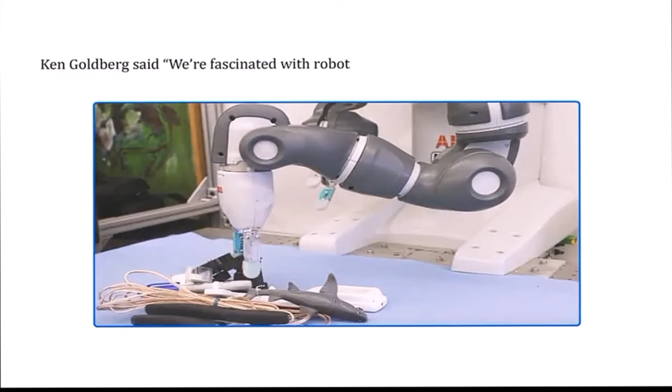Today, let me introduce you to robotics. All of you must have seen the film Wall-E based on robots. If yes, then you must be aware of what robots are and how they have changed human lives. Ken Goldberg said, "We are fascinated with robots because they are reflections of ourselves."

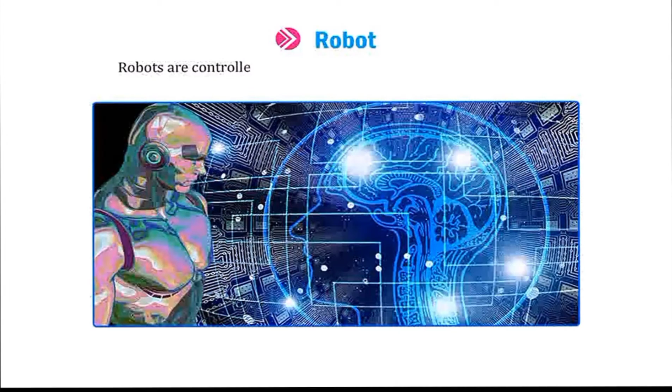First, let us talk about robot. A robot is a machine that is programmed by a computer and can do many complex actions automatically. Robots are controlled by an external control device or from within. They can be designed in human form, but most of them are based on machine design. They are programmed to perform all tasks regardless of their looks.

The word robotics has been derived from the word robot. It was introduced to the public by the Czech writer Karel Čapek. This word comes from the Slavic word robota, which means slave or servant.

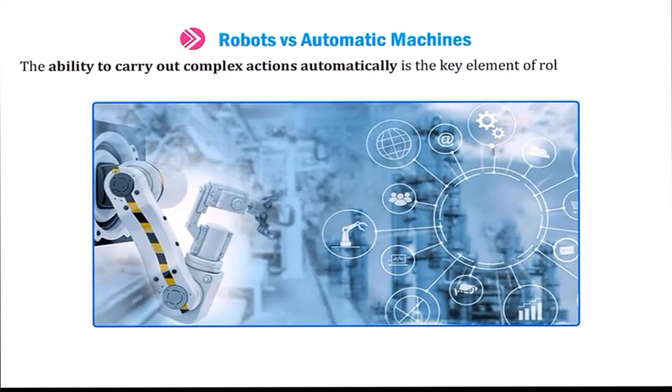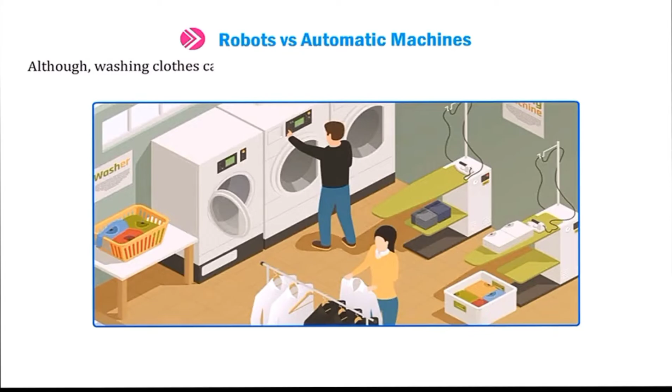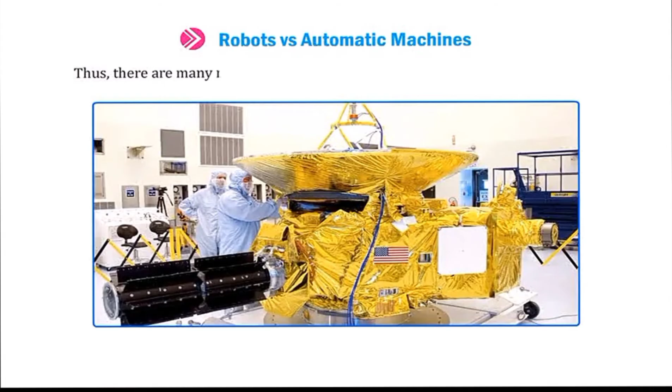Alright students, let us know more about robots versus automatic machines. The ability to carry out complex actions automatically is the key element of robotics, but it is also true for many other machines like washing machine, microwave, dishwasher, etc. Although washing clothes cannot be considered a complex series of actions, flying a plane on autopilot mode definitely consists of a complex set of steps. Thus, there are many machines that are almost at the cusp of automation and robots.

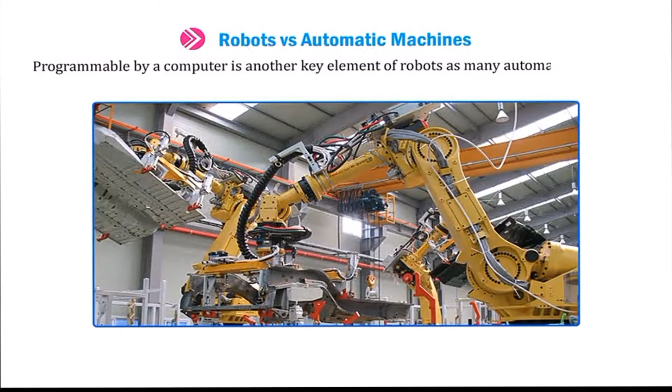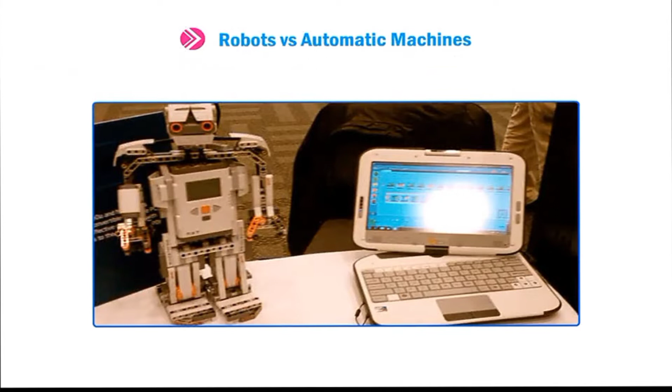Programmable by a computer is another key element of robots, as many automatic machines are programmed mechanically and not very flexible. But since computers are found everywhere now, it becomes difficult to use this aspect to distinguish a robot from another machine. How can you differentiate between a robot and an automatic machine?

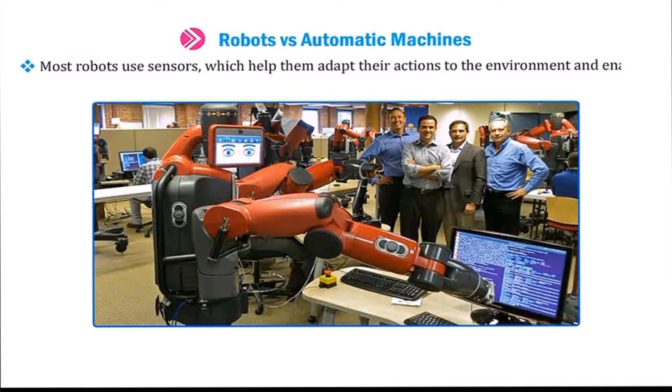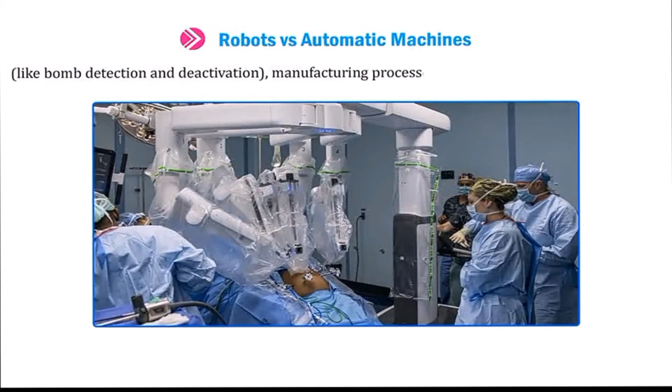Most robots use sensors, which help them adapt their actions to the environment and enable them to carry out complex tasks. Robots can be used in any situation and for any purpose, but primarily they are used in dangerous environments like bomb detection and deactivation, manufacturing processes, or where humans cannot survive.

Students, now let us talk about history of robots. The following table gives you a quick glimpse of the history of robots.

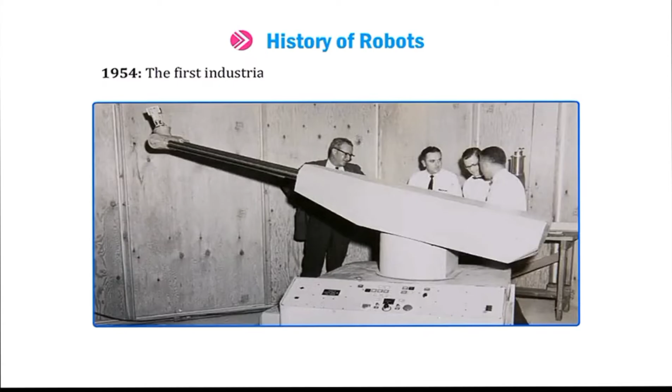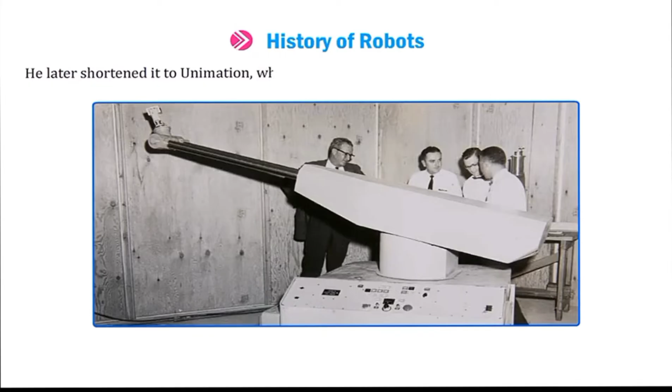1954. The first industrial robot, Unimate, was designed by George Devol. He coined the term universal automation, later shortened to Unimation, which became the name of the first robot company in 1962.

1978. The Programmable Universal Machine for Assembly, PUMA, robot was developed by Unimation, with General Motors design support.

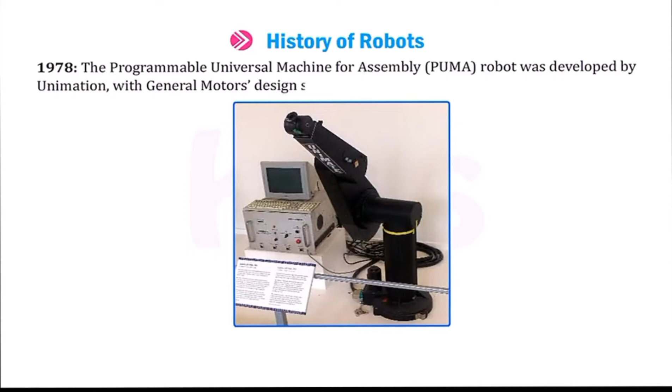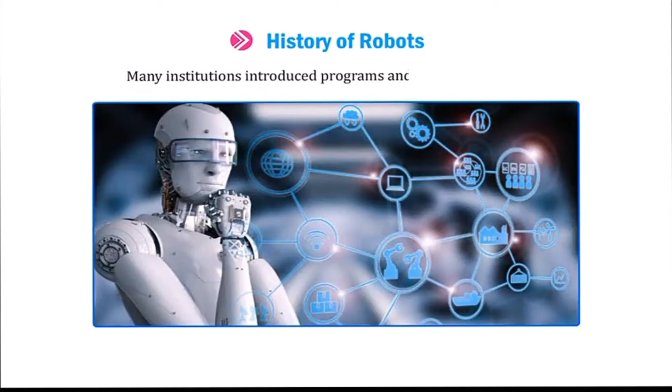1980s. By this era, the robot industry had entered a phase of rapid growth. Many institutions introduced programs and courses on robotics. These courses were spread across various branches, such as mechanical engineering, electrical engineering, and computer sciences.

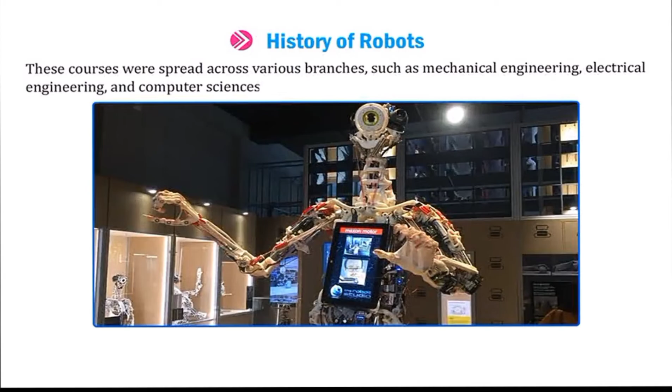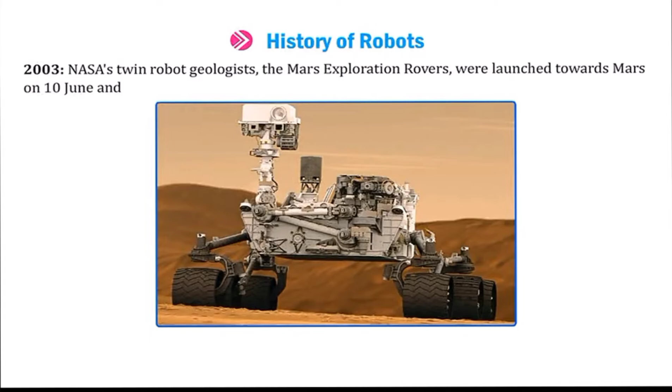2003. NASA's twin robot geologists, the Mars exploration rovers, were launched towards Mars on 10th of June and 7th of July in 2003. They were sent in search of water on Mars. This program was a long-term effort in the field of robotic exploration of space.

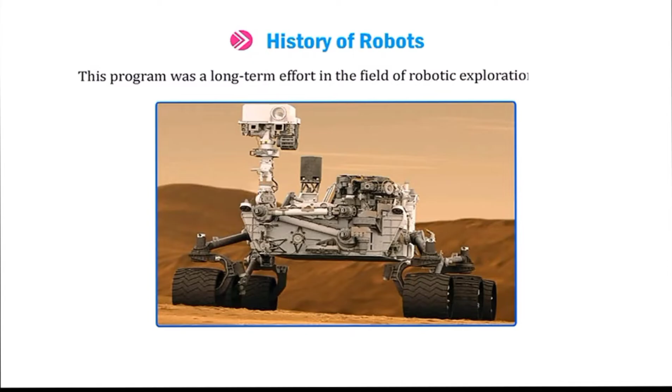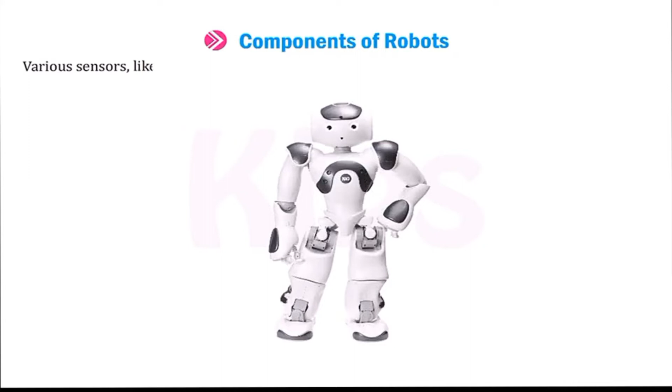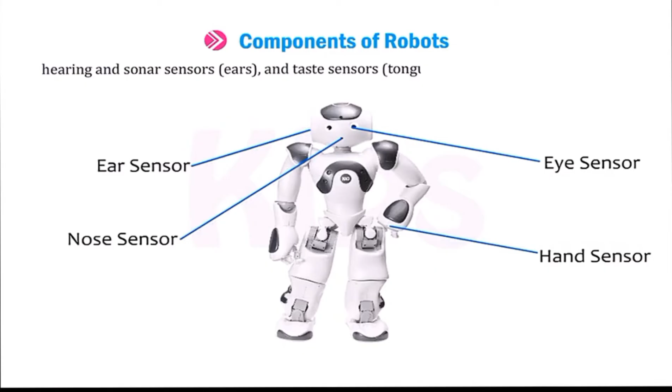Okay students, let me tell you some components of robots. A robot has the following essential components. Robots interact with the physical world via sensors and actuators. Various sensors like light sensors (eyes), touch and pressure sensors (hands), chemical sensors (nose), hearing and sonar sensors (ears), and taste sensors (tongue) give a robot awareness of its environment.

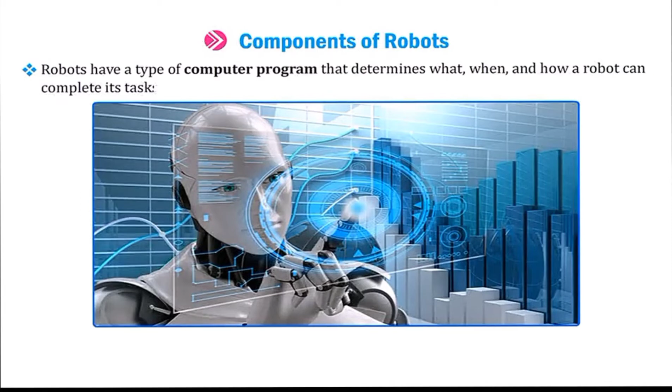Robots can easily move around and have electrical components for providing power and controlling the machinery. Various mechanical constructions help to shape or form the design of a robot so that they can accomplish a particular task. Robots have a type of computer program that determines what, when, and how a robot can complete its task. They can carry out a complex series of actions automatically.

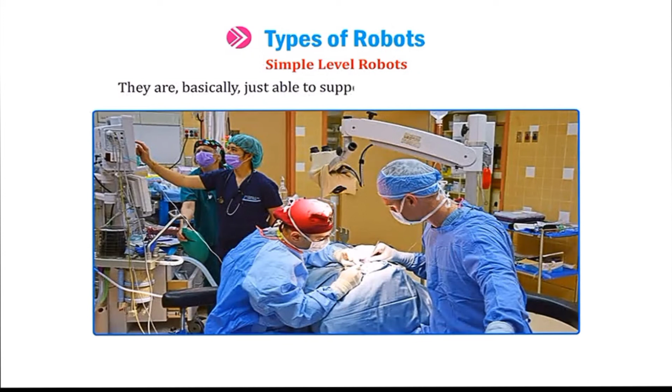Students, now let us talk about types of robots. Depending upon the use and application, robots can be classified into three types. Simple level robots: these are simple and cannot carry out heavy or complex tasks. They are basically just able to support humans in their daily tasks, for example washing machines. Middle-level robots...

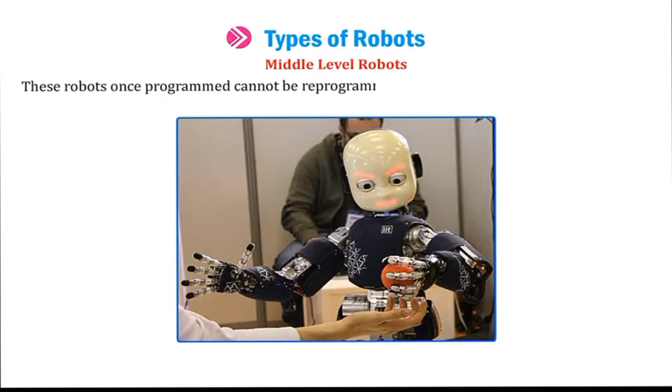These robots, once programmed, cannot be reprogrammed and have sensor-based circuits which can perform multiple tasks, for example fully automatic washing machines. Complex level robots: these robots can be programmed and reprogrammed easily. They have complex model-based circuits, for example laptops or computers.

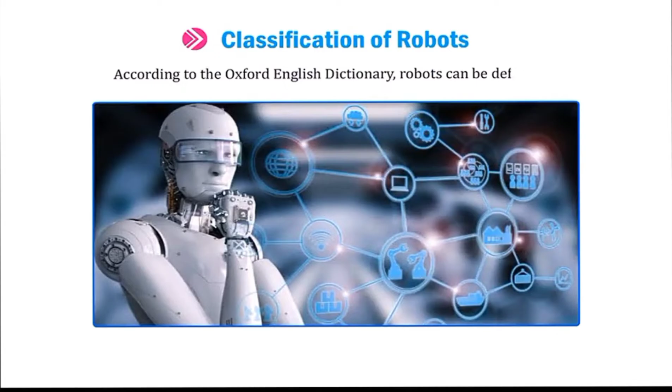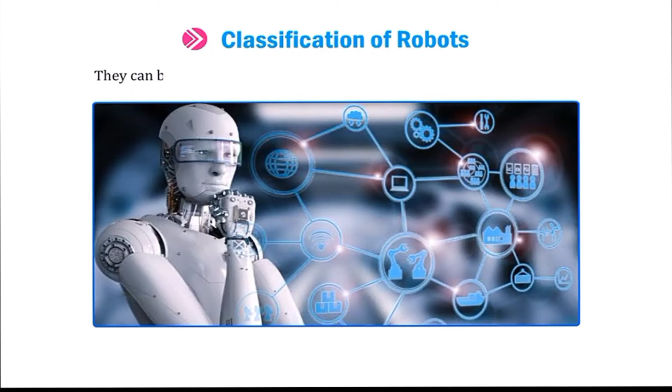Alright students, let us know more about classification of robots. According to the Oxford English Dictionary, robots can be defined as a machine capable of carrying out a complex series of actions automatically, especially one programmable by a computer. They can be classified based on their working environment or application. Based on working environment, the robots are classified as follows based on the environment in which they can be used.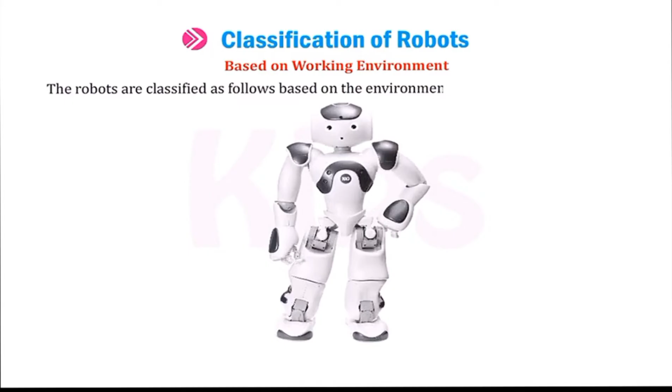Fixed robots: these are mostly used in industries with a well-defined work environment adapted for robots. These robots perform specific repetitive tasks like painting parts in a car manufacturing plant. With high-capacity sensors, they are also used increasingly for high-precision surgery.

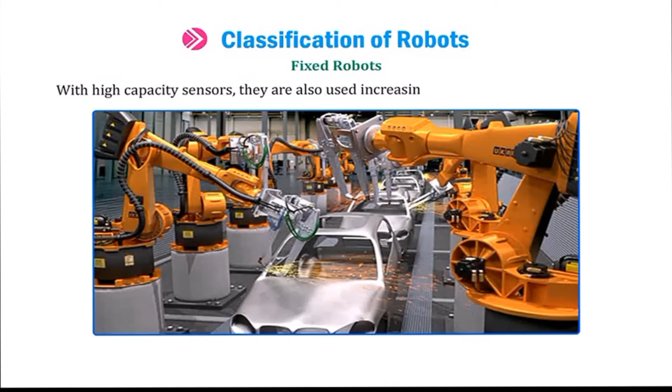Mobile robots: they move around and perform tasks in large, uncertain environments. They are quite helpful in situations that are not defined in advance and keep on changing over time.

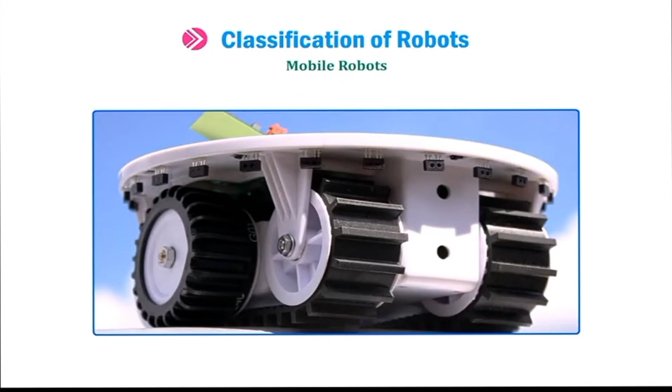They deal with unpredictable entities like humans and even animals. Self-driving cars, vacuum cleaners, and drones are some common examples of mobile robots.

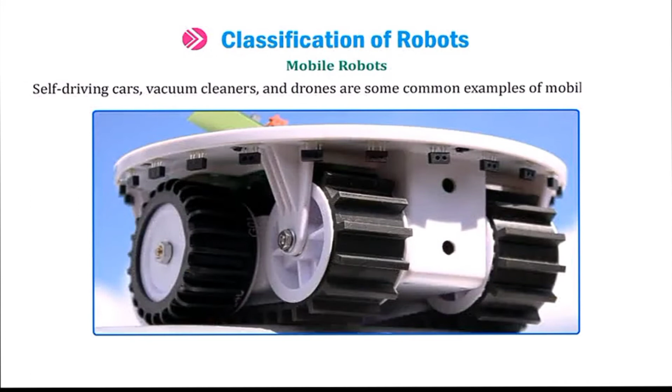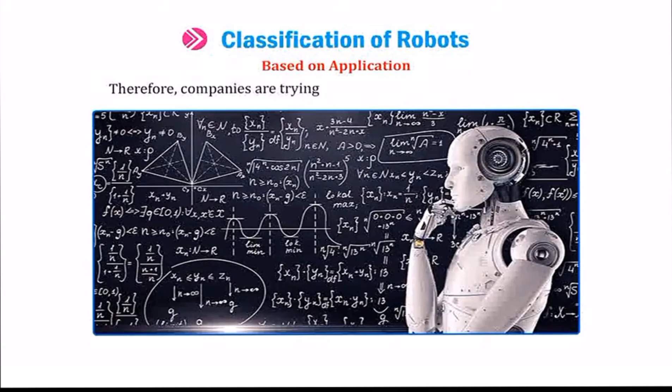Based on application, robots have precision, accuracy, speed, and dependability. Therefore, companies are trying their best to bring robots into action.

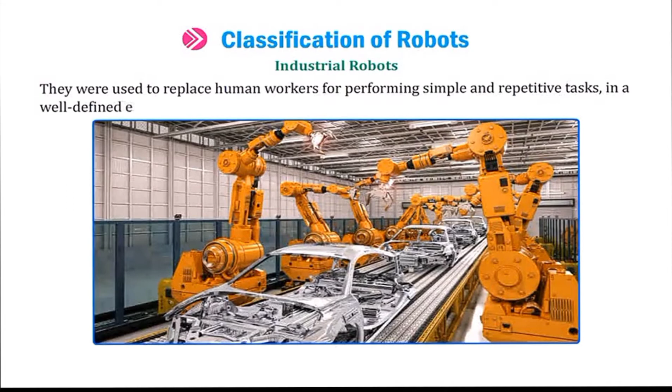Industrial robots. Initially, the robots that were created were industrial robots. They were used to replace human workers for performing simple and repetitive tasks in a well-defined environment. The simplicity of the task and well-defined environment simplify their design process.

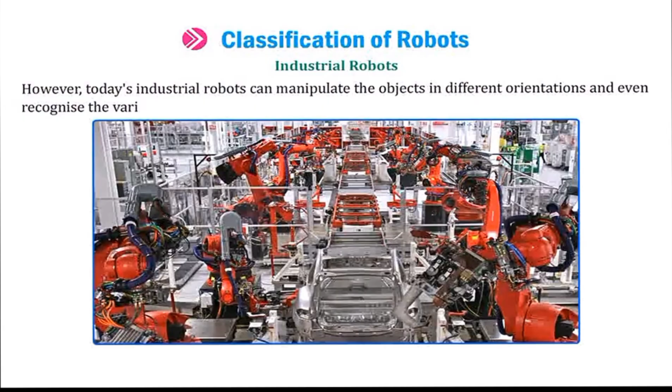However, today's industrial robots can manipulate the objects in different orientations and even recognize the various objects that need to be packaged in a different order.

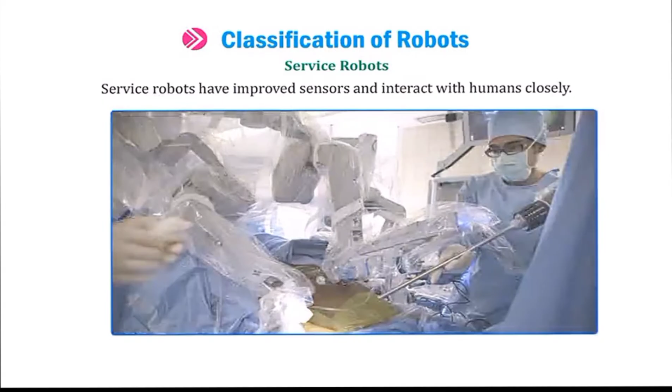Service robots. Service robots have improved sensors and interact with humans closely. They are used to assist humans in tasks like cleaning, vacuum cleaners, transportation, self-driving cars, defense applications, drones and medical procedures, surgery, etc.

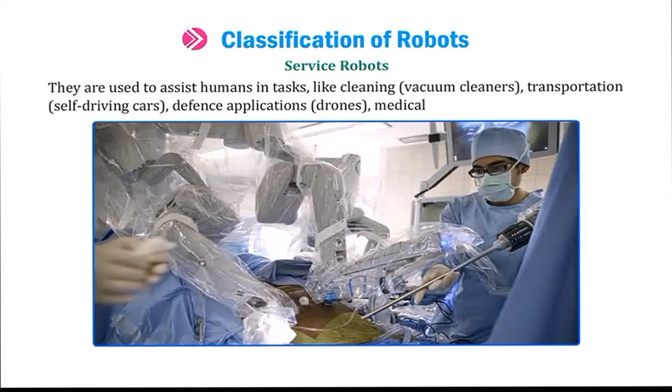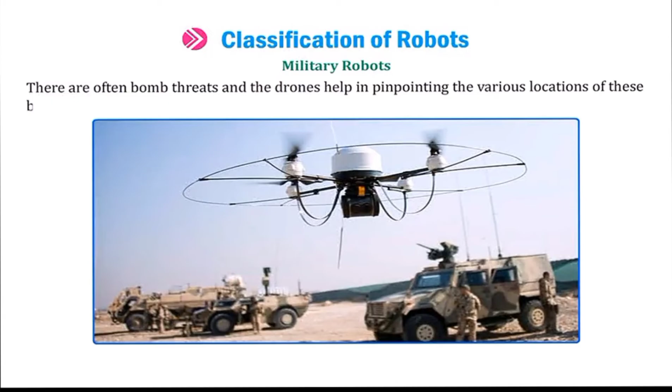Military robots. Being in the army is a tough job and robots help to make the work of the soldiers easier. There are often bomb threats and the drones help in pinpointing the various locations of these bombs, which acts as a big help to the army men.

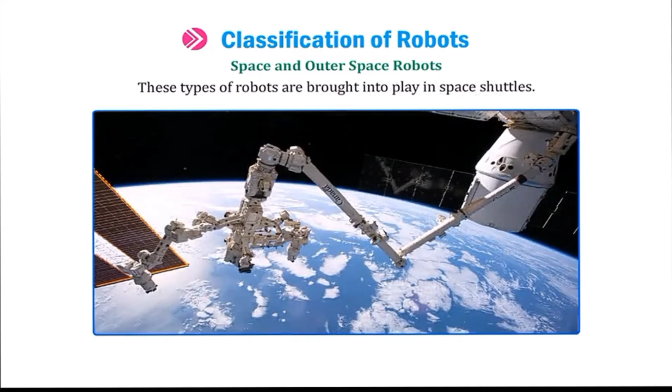Space and outer space robots. These types of robots are brought into play in space shuttles. They are used in international space stations together with Mars explorers and other robots. They are employed in space exploration and other such activities.

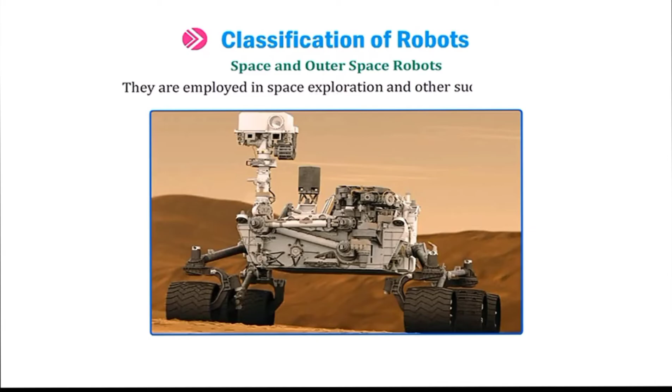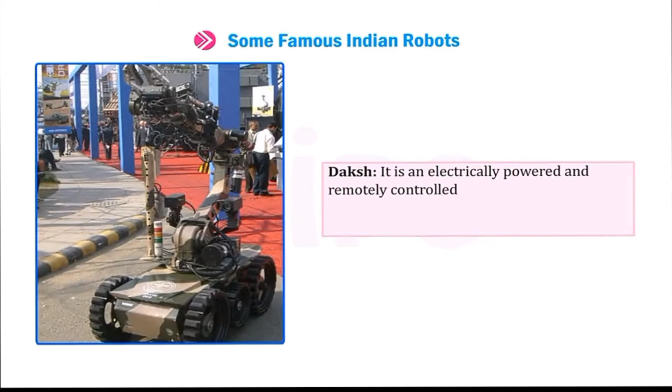Students, now let us talk about some famous Indian robots. Daksh. It is an electrically powered and remotely controlled robot. It is used for locating and destroying harmful objects safely.

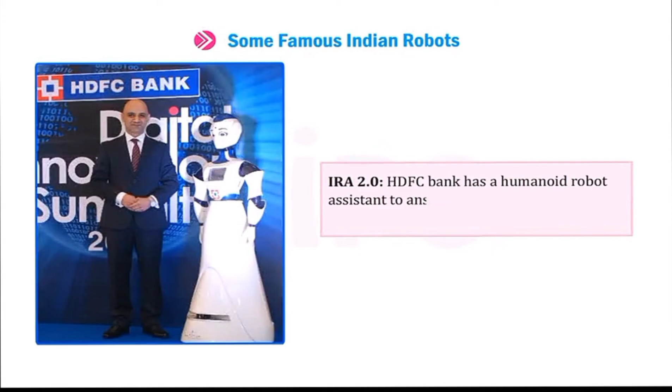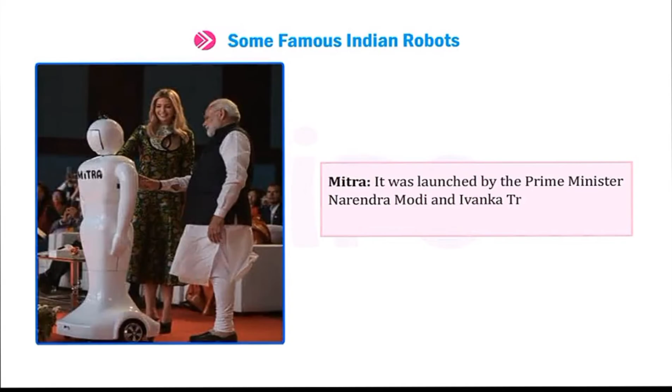IRA 2.0. HDFC Bank has a humanoid robot assistant to answer the frequently asked questions by customers. Mitra. It was launched by the Prime Minister Narendra Modi and Ivanka Trump at GES Conference 2017.

Manav. India's first 3D printed humanoid robot. It can perform push-ups and play football.

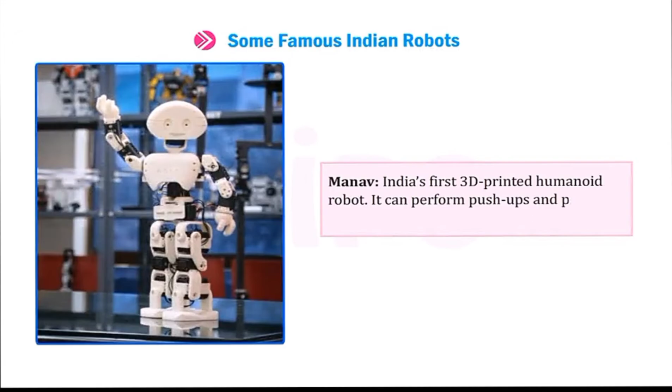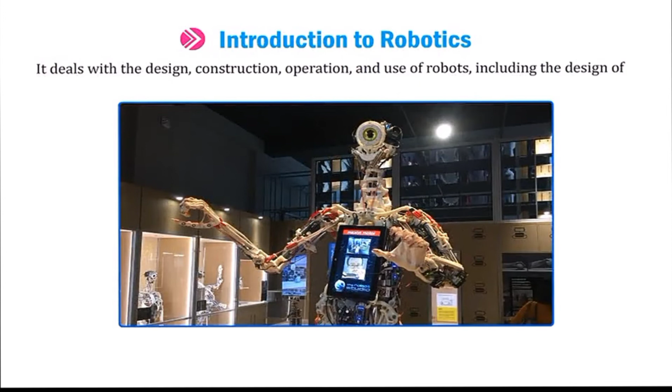Students, let me introduce you to robotics. Robotics is a branch of engineering and science. It deals with the design, construction, operation and use of robots, including the design of computer systems for their control, sensory feedback and information processing.

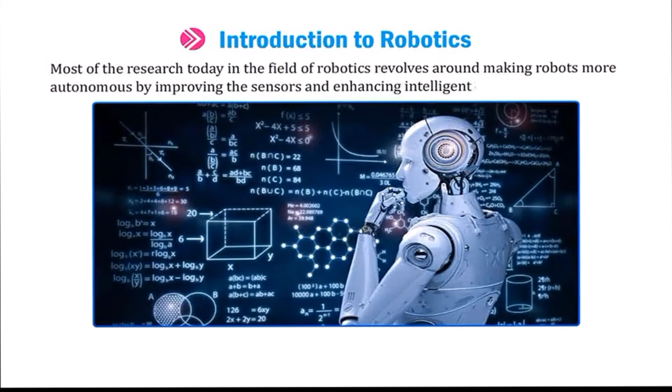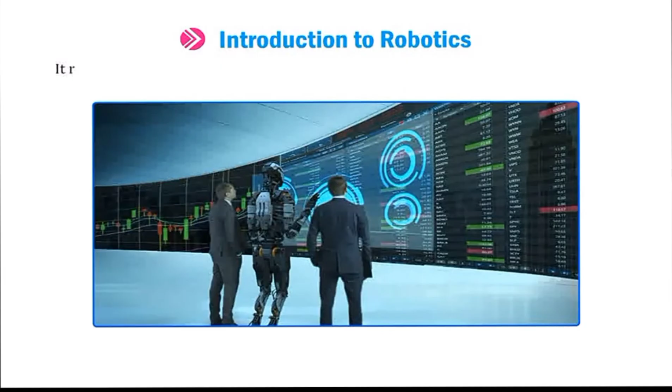Most of the research today in the field of robotics revolves around making robots more autonomous by improving the sensors and enhancing intelligent controls. Efforts are made to make the robots more flexible and adaptable towards new situations based on human interaction and past learning. It requires both sensing and intelligence as well as understanding the psychology and sociology of human interactions.

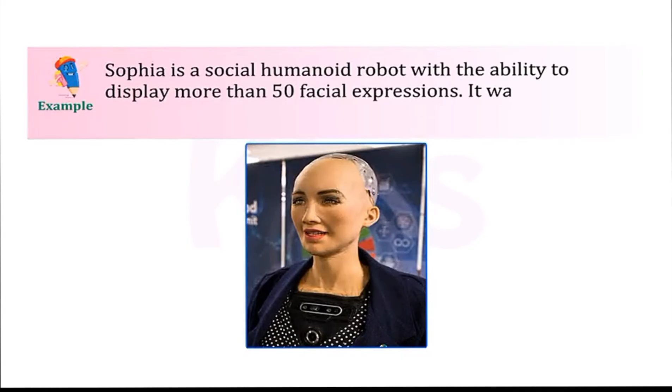Example: Sophia is a social humanoid robot with the ability to display more than 50 facial expressions. It was developed by a Hong Kong-based company, Hanson Robotics. Sophia was activated on 14 February 2016 and made her first public appearance in mid-March 2016 in Austin, Texas, United States.

With the granting of citizenship by Saudi Arabia in October 2017, Sophia became the first robot to receive the citizenship of any country. In November 2017, Sophia was named the United Nations Development Programme's first ever Innovation Champion and the first non-human to be given any United Nations title.

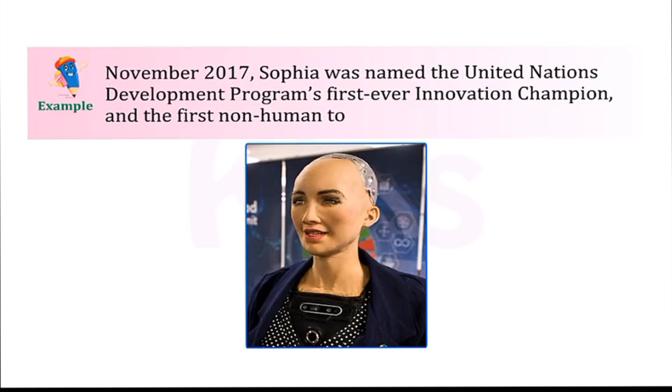Students, let's talk about robotics and artificial intelligence. Robotics and artificial intelligence are often confused to be the same. However, they are totally different terms. The difference between them is shown in the image.

As this is clear from the image, there is a very thin line where these two fields overlap. One can say that artificial intelligence is the brain, while robotics is the body. It deals with the development of robots, and artificial intelligence is the computer science branch that helps in developing the software. Let us consider an example.

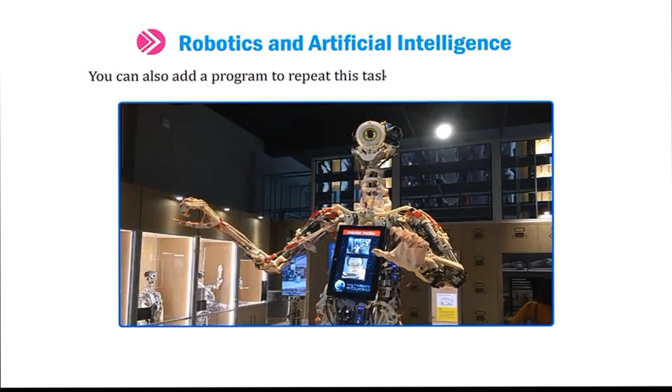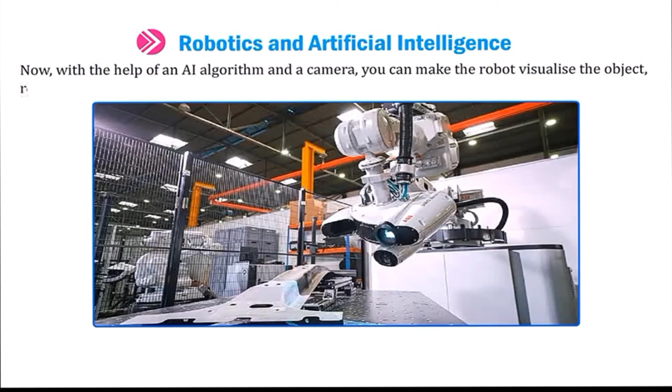You can design a simple robot and program it to pick up an object and place it at another location. You can also add a program to repeat this task until the robot is told to stop. Now, with the help of an artificial intelligence algorithm and a camera, you can make the robot visualize the object, recognize what it is, and determine where it should be placed.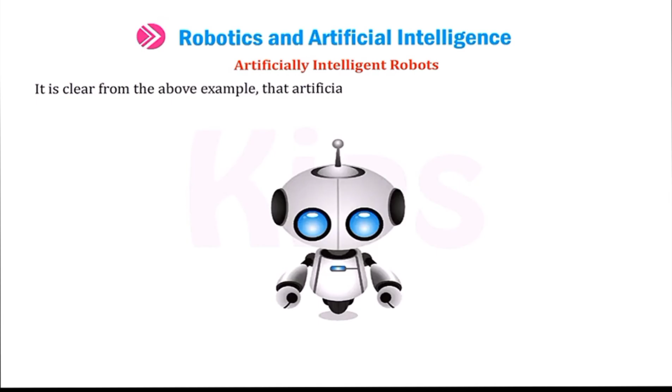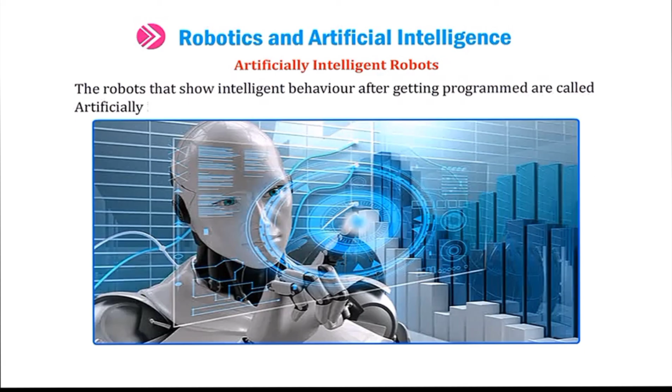Artificially intelligent robots. It is clear from the above example that artificial intelligence is the technology that is used to program robots. The robots that show intelligent behavior after getting programmed are called artificially intelligent robots. These are the future of technology. With further research and development, you can expect artificially intelligent robots to start behaving like humans.

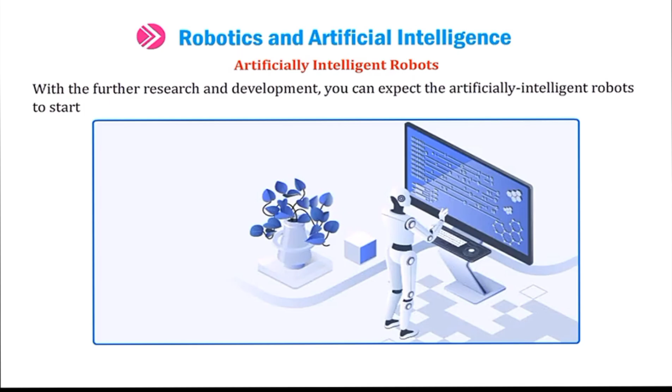Mobile robots move around and perform tasks in large, uncertain environments. Industrial robots can manipulate objects in different orientations and even recognize the various objects that need to be packaged in a different order. Service robots have improved sensors and interact with humans closely to assist them in tasks.

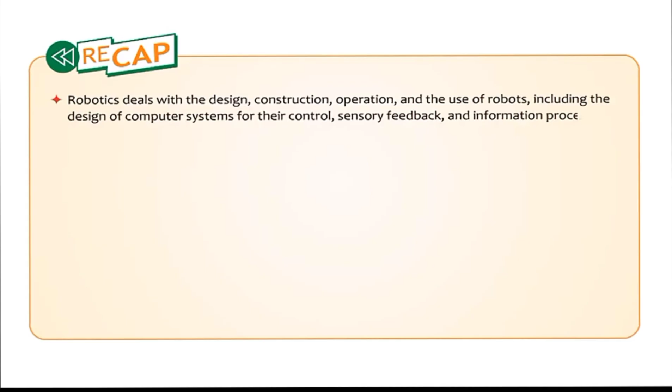Robotics deals with the design, construction, operation, and the use of robots, including the design of computer systems for their control, sensory feedback, and information processing. The robots that show intelligent behavior after getting programmed are called artificially intelligent robots.